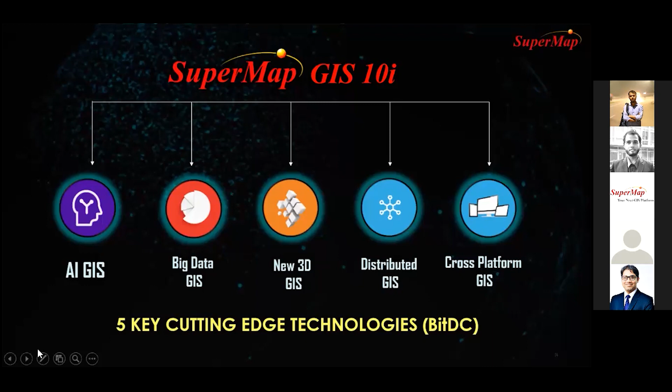Thereafter, the technology that helped SuperMap reach its peak stage is AI technology integrated with GIS. Eventually, with the evolution of new technologies like big data GIS, 3D GIS, cloud GIS, and cross-platform GIS, we reached the plateau of productivity, meaning we attained maturity as a software company.

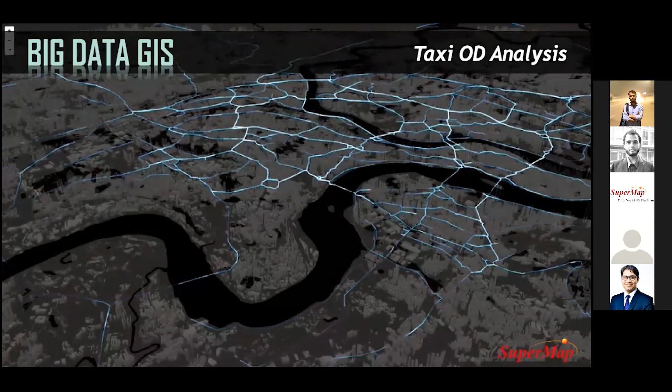About big data GIS in SuperMap: it has high ability for big data management, analysis, data processing, and visualization. Here is a demo showing the big data of Chongqing City's dynamic track in the morning peak hour. We gathered real-time GPS data of the taxis and showed them on the map like this.

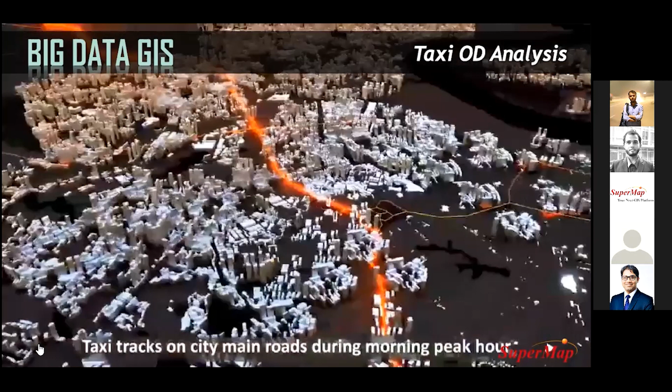In 2018, SuperMap released the new technology of artificial intelligence through the integration of GIS with AI. Many successful cases have been achieved in different countries. Two of the most updated solutions are the palm tree detection project and the building detection from oblique photogrammetry, where deep learning was used.

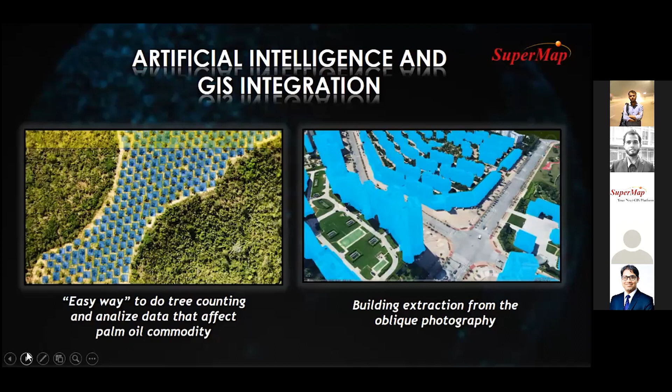Now, the next technology is 3D GIS. By using the spatial 3D data model format, we can achieve Open Geospatial Consortium. Here are some pictures of multiple sources of 3D that SuperMap can support.

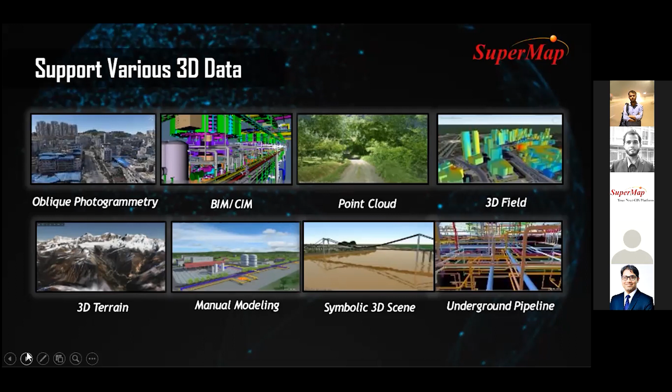These include but are not limited to 3D terrain, oblique photogrammetry, BIM, point cloud, artificial model, water surface, underground pipeline, and 3D field. I'm going to show you another demo regarding the 3D supported cross-platform. This is an oblique photogrammetry model of an industrial park.

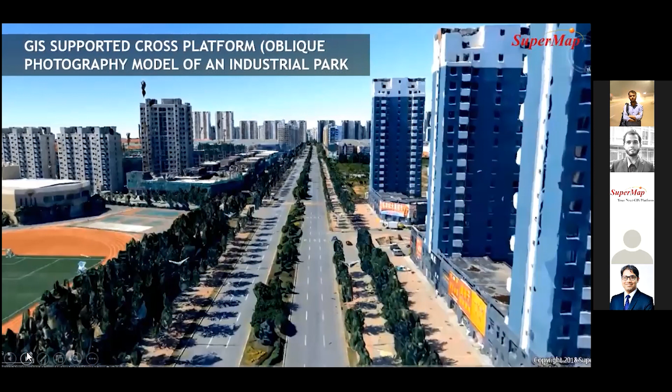Another demo is about the model data. Here, the model data is about 500 square kilometers. But as you can see from the video, SuperMap can load it really smoothly and quickly.

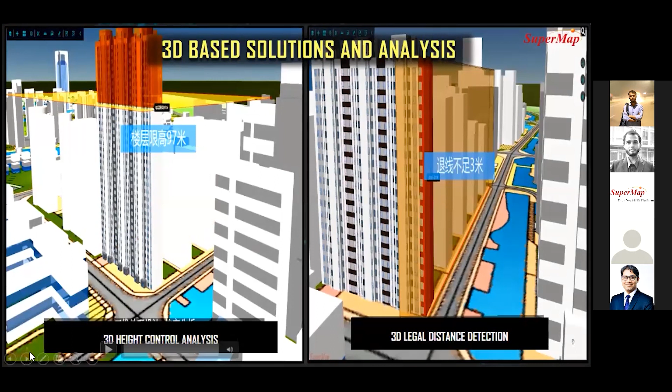This is about distributed GIS technology, and it includes edge GIS technology, cloud native GIS technology, distributed geospatial analysis and processing technology, distributed geospatial data engine technology, and geo-blockchain technology.

Now about cloud native GIS: it deeply integrates microservices and Docker layout, and provides a variety of SDKs to build big data, AI, and 3D GIS application systems based on the cloud native architecture.

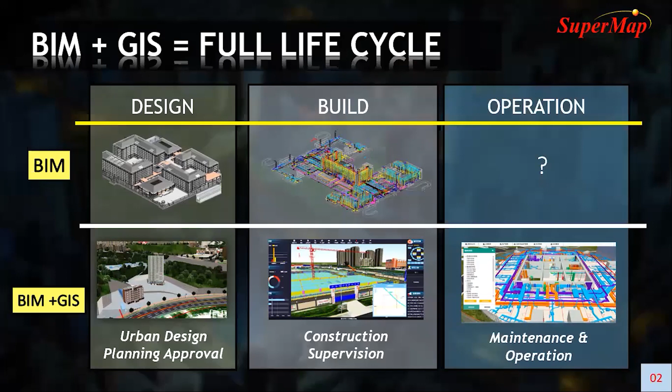Obaidur, we cannot hear you. Okay, so sorry.

The reason this matters is that GIS information can be applied at the country, regional, or city scale. On the other hand, BIM data is closely tied to designing and constructing a specific object, structure, or shape. By combining these two, you get the capability to build any structure at an object level.

Here you can see vector data plus BIM, terrain dataset plus BIM, oblique imagery plus BIM, and video with BIM showing 3D simulation and street views. You can gather field datasets—oblique photography, terrain, point cloud, and also pipeline and water effects—into a single spatial 3D model.

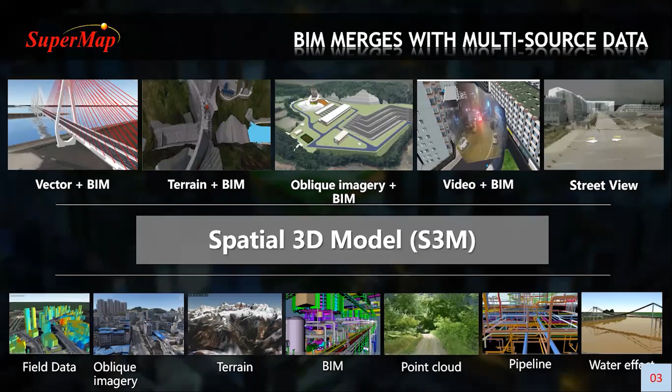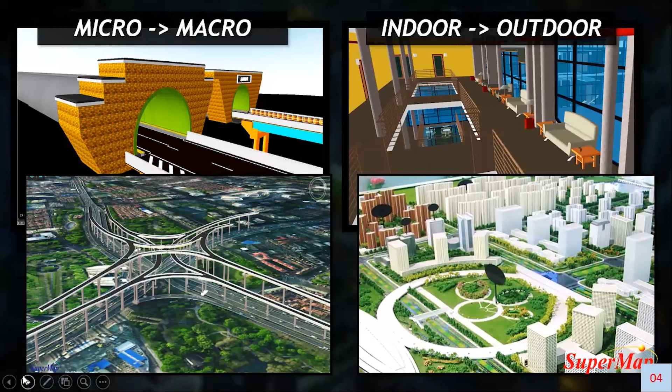So GIS adds to the picture by adding a smarter and larger environmental context, meaning that the object becomes part of the route, utilities, and land in that environment. Integrating GIS and BIM data allows design and construction companies to collect accurate and valuable data that leads to much more effective and efficient design and project management, like this.

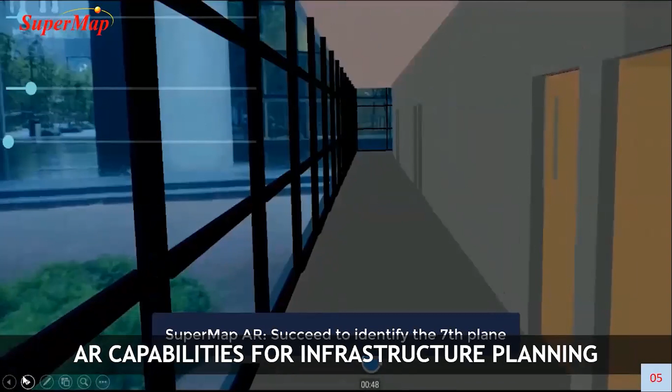Here you can see AR capabilities, augmented reality for infrastructure planning, which combines BIM and GIS in an integrated way to capture, design, and maintain. For future perspectives, it can allow you to identify any floor or any object of the building.

Here are some of the benefits of BIM and GIS integration. The query system for objects according to query conditions includes contain, within, disjoint, intersect, and so on—other methods to query your BIM model and also GIS datasets.

Some of the benefits of BIM and GIS integration may be eliminating data redundancy, moving data seamlessly between the stages of the design and construction process, adding more effective geospatial context to the BIM process, reducing cost and saving money, and better, improved design.

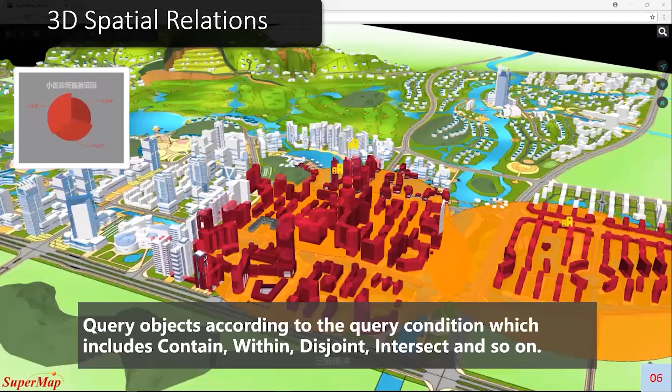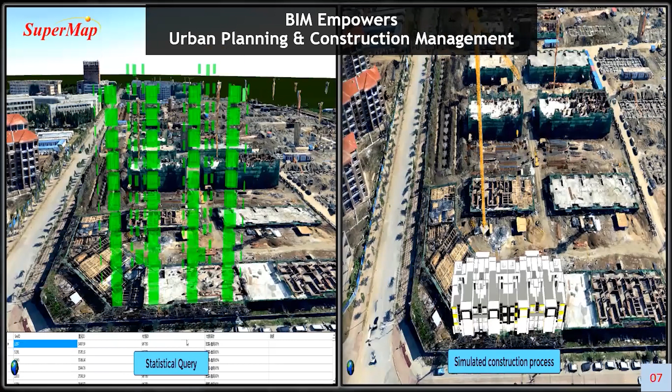Here you can see the query objects according to the query condition, and BIM empowers urban planning and construction management. On the left side you can see the statistical query, and on the right side you can see the simulated construction process of a building information model, which is really integrated with the geographic information system.

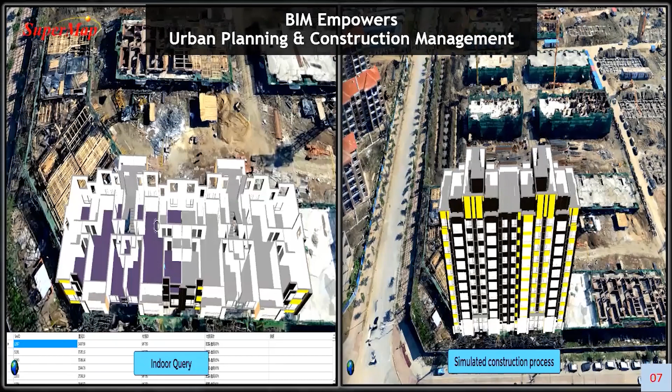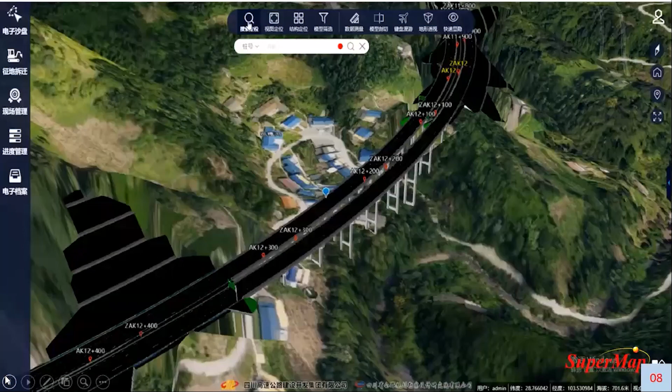Here is an example showing the integration of GIS and BIM, showing the construction of bridges along with GIS, visualizing the dataset in both 2D and 3D, and spatial querying of the BIM and GIS datasets.

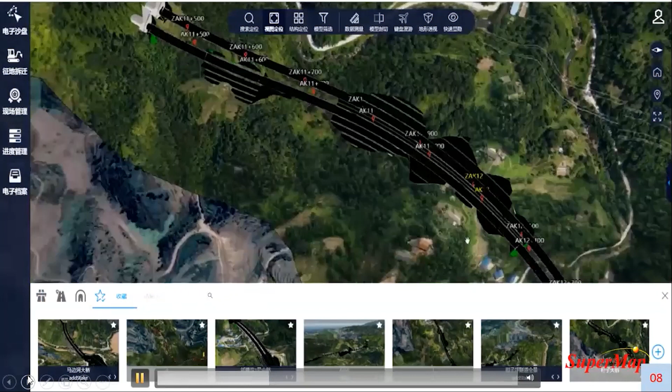This is combining oblique photography, BIM, and 2D and 3D GIS datasets. So the important part is to import the BIM dataset into the GIS platform. SuperMap has a plugin conversion tool that uses common intermediate formats of BIM datasets, allowing you to import from services like Autodesk Revit, Bentley Infrastructure, Autodesk Civil, and other applications.

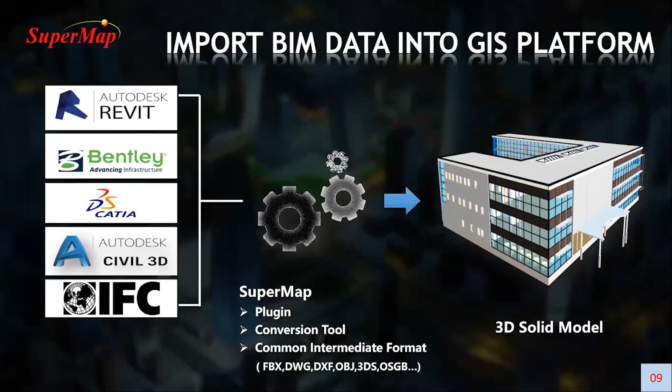Let's go ahead to smart city and urban planning with SuperMap. GIS is actually deployed at every stage of planning and development of a smart city. The underlying framework is served by information and communication technologies, while the focus is on the spatial or GIS element. SuperMap operates across all stages of the life cycle, from modeling, planning, and building to managing, across the full spectrum of functionalities.

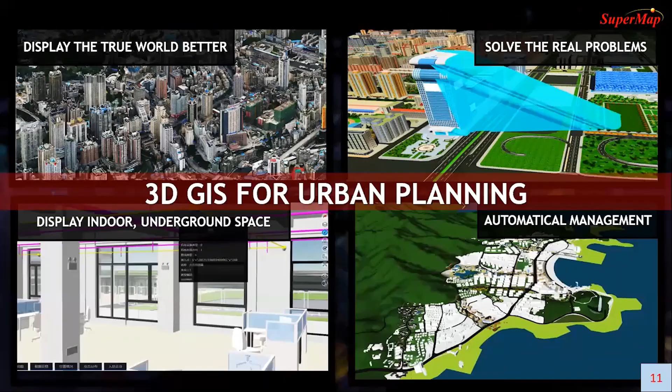Five major technologies support territorial spatial planning. Various types of planning data are analyzed, multi-plan data standards are sorted out, and multi-plan differences are analyzed. Based on the double evaluation system and the three areas and three lines, the analysis of regional differences and maps, along with a data integration system, formulates unified data standards.

Using big data analysis, calculation, simulation, and other means, we tap into the value of the data and provide strong technical support for building the motherland into a livelihood paradise with green mountains, green waters, and fresh air. Here you can see the display of true world to better solve real world problems, displaying indoor and underground space, and automatic management of development.

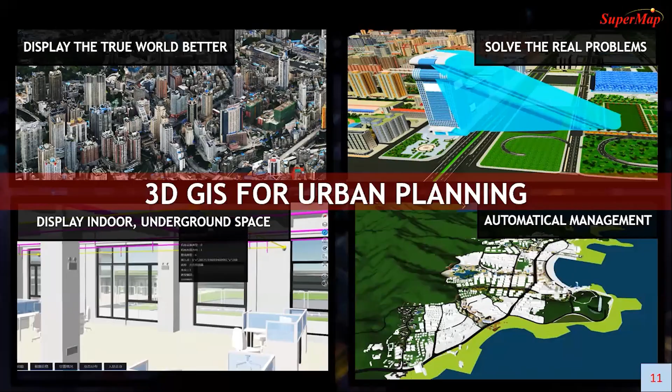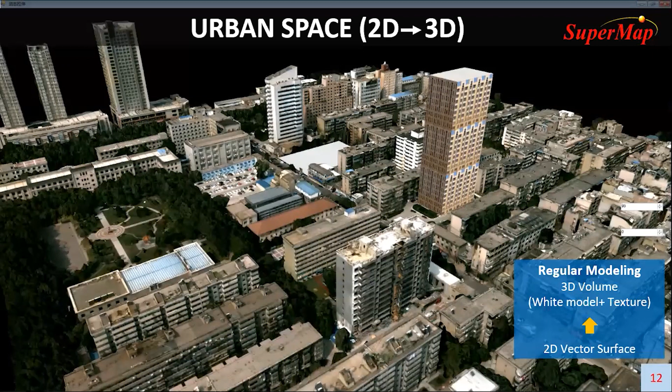This is the modeling of 3D volume using 2D vector surfaces applied to the white model and building texture. Here you can see the vector datasets have been applied to the white model, and texture of buildings has been added, which eventually shows the 3D design of a city or area of the city.

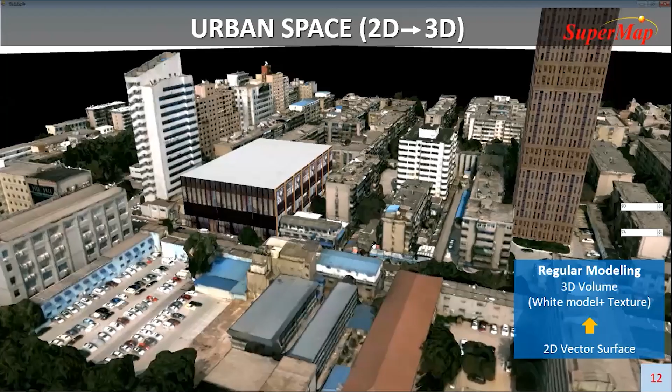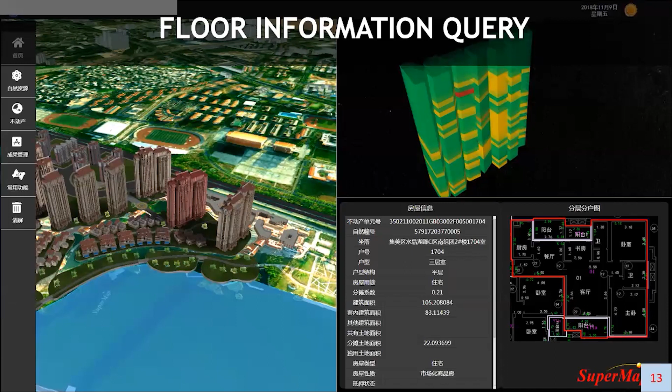Querying each and every floor of the building enables the engineer to work accurately and faster. SuperMap enhances your capabilities to query floor information better than any other solution.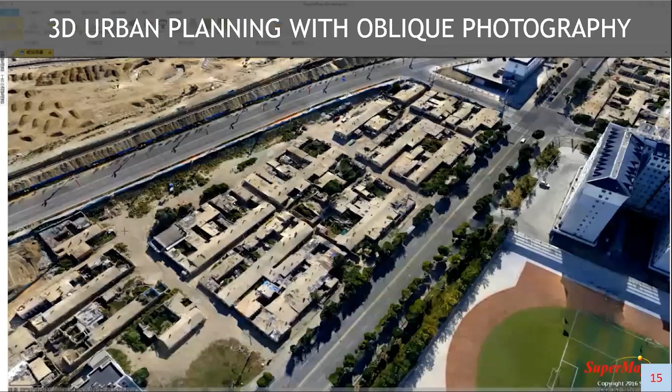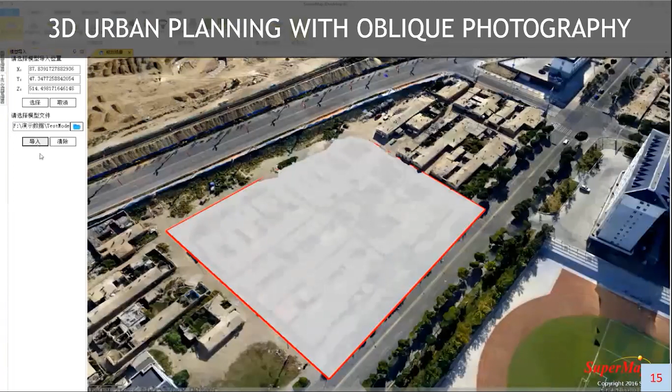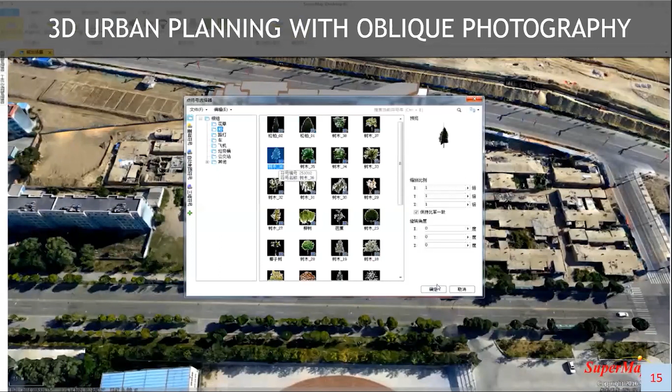Modeling 3D urban planning with oblique photography, which is modeling objects in 3-dimensional form, has been very useful for urban applications such as planning, management, and representation of urban scenarios. Nowadays, 3D city models play a more and more important role in GIS. 3D city modeling is also one of the fastest growing research topics in the technology of photogrammetry. This is a situation where the 3-dimensional auxiliary planning system is used.

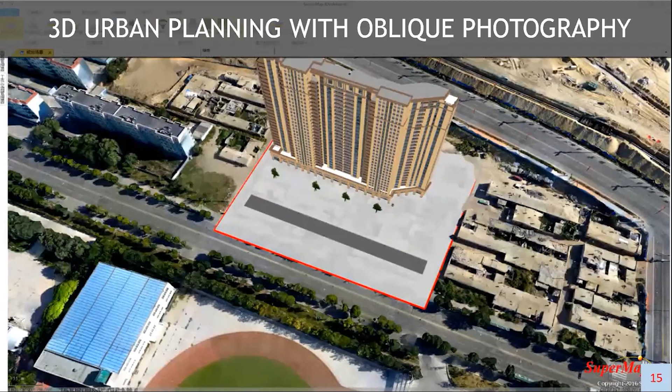SuperMap has the capability to handle large datasets of oblique photogrammetry. Here you can see this dataset is 3.2 terabytes in size, which is oblique photogrammetry, and you can browse faster and visualize clearly using SuperMap.

Let's go ahead to 3D technology for transportation. As in almost every field of life, GIS can help achieve excellence in transportation as well. It significantly aids in planning, monitoring, and managing complex systems involved in transportation planning and management more effectively. GIS helps in determining capacity management, capacity enhancement, improving operation, and identifying the most strategic investments for keeping the transportation system in any country running operationally.

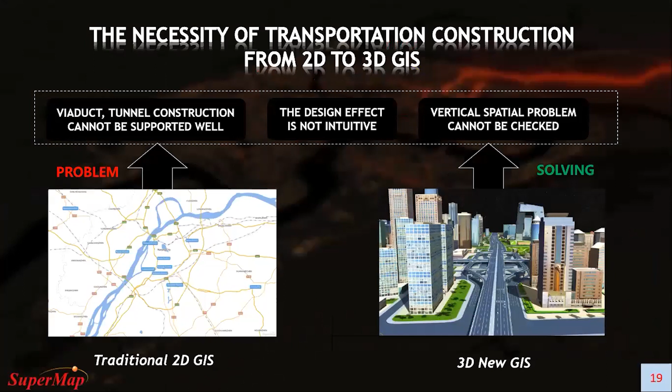Let's try to understand how we can use GIS transportation for better management of road infrastructure. Here you can see the necessity of transportation construction moving from 2D to 3D GIS. In our traditional 2D GIS, we normally face problems like viaduct, tunnel construction not being well supported, design effects not being intuitive, or vertical spatial problems not being checkable. All of these problems can be solved using 3D GIS in transportation construction.

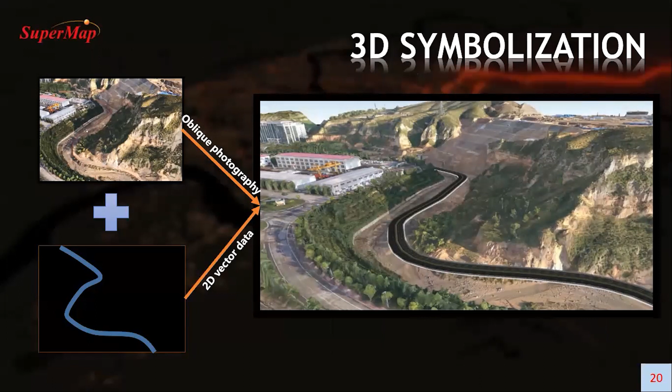Here you can see oblique photography, which is a 3D photogrammetry model, and using 2D vector datasets, we can produce a 3D symbolization of road transportation. You can also integrate 2D and 3D visualization in SuperMap.

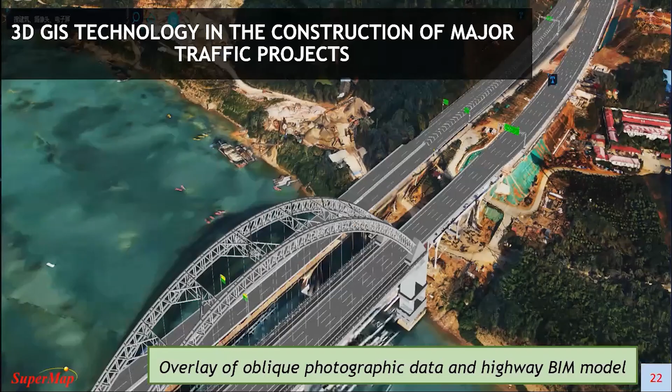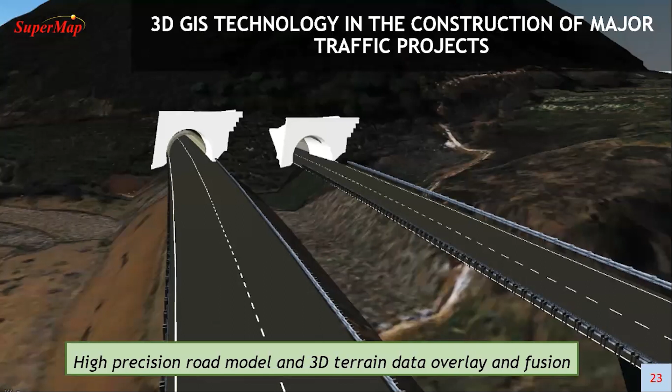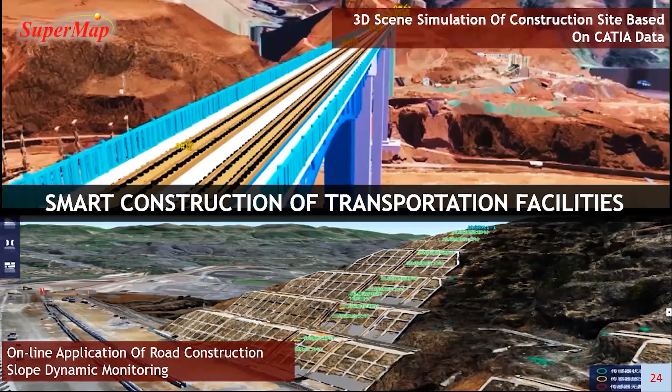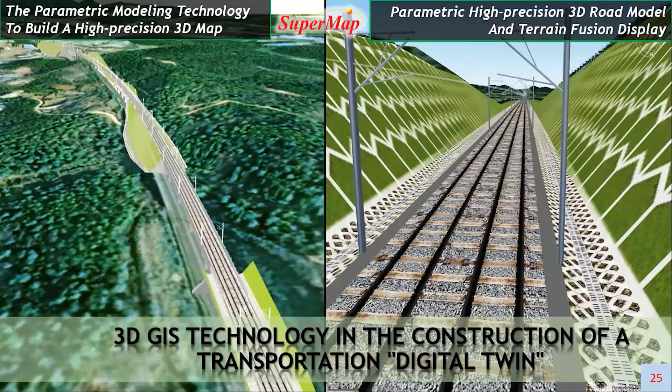This is from the dataset of the computer-aided 3D interactive platform called CATIA, where you can do smart construction of transportation facilities based on online road construction and slope dynamic monitoring applications. On the left you can see parametric modeling technology used to build a high precision 3D map, and on the right the parametric high precision 3D road model and terrain fusion display, which are significant examples of 3D GIS technology in the construction of transportation GIS or transportation digital twin.

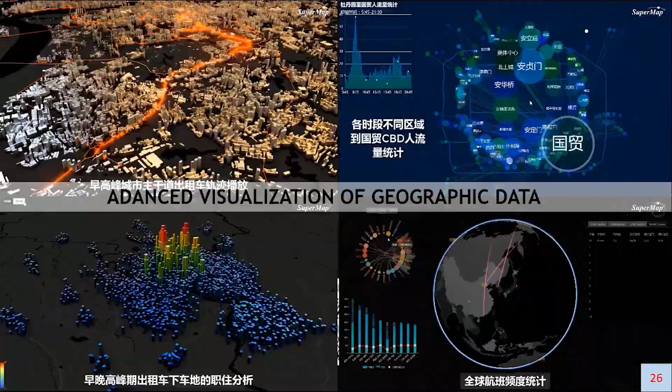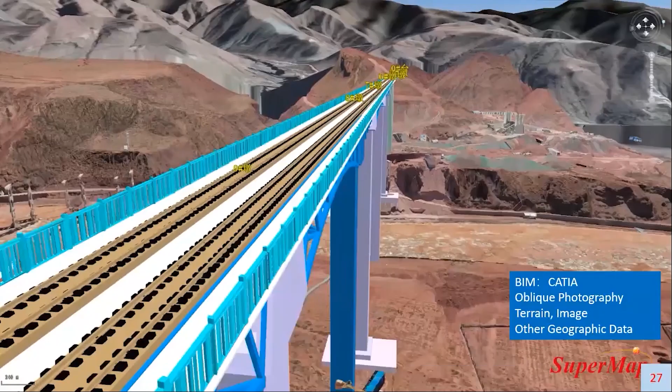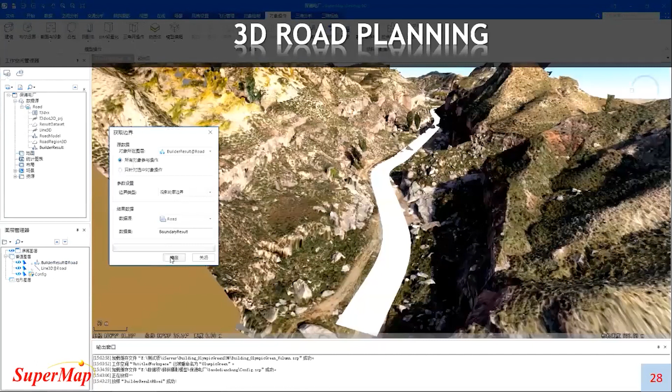This is the integration of 2D GIS data and oblique photogrammetry while planning a road network for a development purpose. Here you can see the 2D road dataset using SuperMap, and also the terrain dataset from oblique photography, integrated into a single dataset to show the 3D model of road transportation planning.

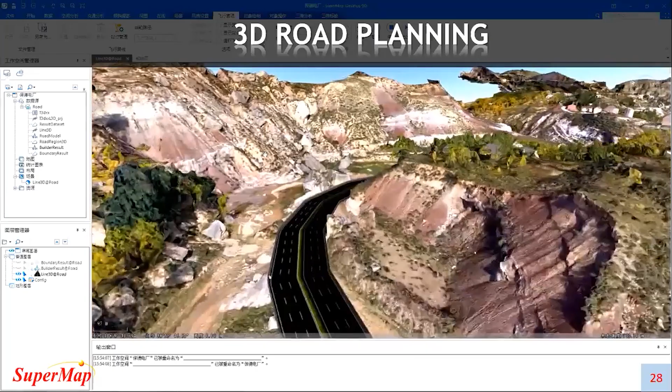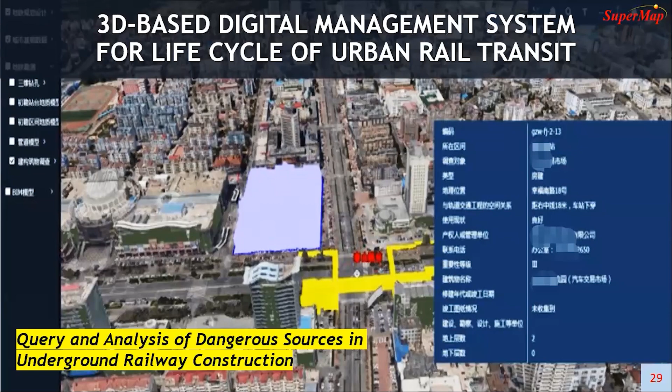One of the major challenges for sustainable development faced by both developed and developing countries is to ensure that all people continue to have reliable access to water supply, sanitation, and other liquid services. Water supply assessment and management are inherently geographical activities requiring the handling of multiple forms of spatial datasets. Various combinations of geographic information systems (GIS) and simulation models are required to improve our knowledge in these areas.

GIS offers a powerful new tool for the collection, storage, management, and display of map-related information, whereas simulation models can provide decision makers with interactive analysis tools for understanding the physical system and judging how management actions might affect that system.

There are four key technologies for smart water or pipeline solutions. First, cloud computing, where you can do resource pooling, elastic expansion, and fast delivery. Second, big data, which involves distributed storage, distributed computing, data mining, and data insight. Third, IoT, the Internet of Things, which uses cameras, sensors, wearable devices, and 4G networks, improving day by day as 5G and 6G emerge.

And last but not least, GIS, the Geographic Information System, which allows map displaying, spatial analysis, and 2D and 3D simulation projects.

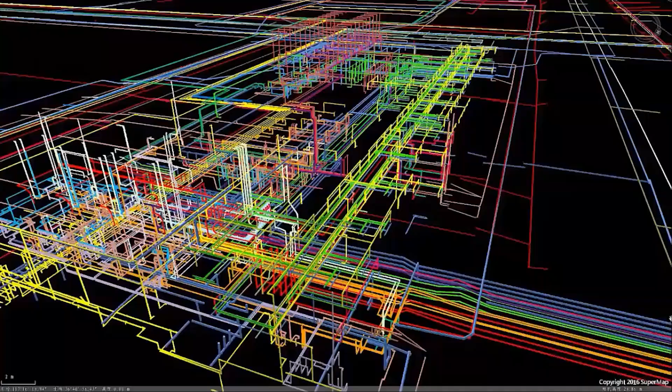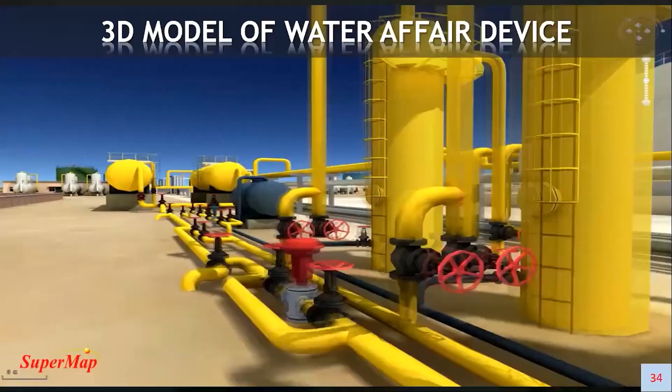Here you can see a simulation of pipeline management in a large area using SuperMap, along with the effect and realistic model of water affair devices.

This is also the effect of liquid flowing within the pipeline. Here you can see how it bears the effect of liquid flow in the pipeline, which is very useful for the management and control of long distance pipelines and oil fields.

As Bangladesh has a land rich in natural gas, this type of monitoring is more necessary for civil engineers and planners.

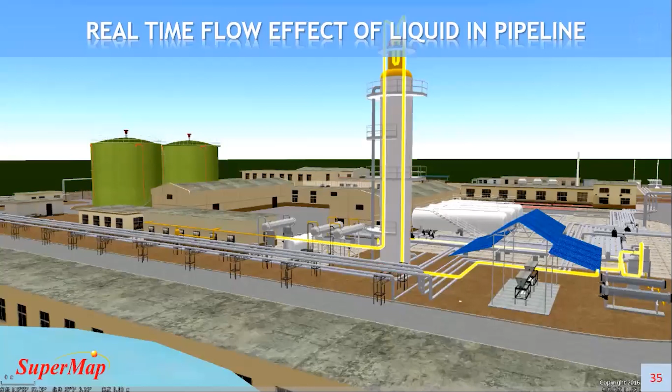Here comes the monitoring and control context. Monitoring and alarming allow for water quality monitoring and alarming, such as pH or water level alarm information management, and contingency plan management, including plan management, plan editing, and plan approval or update. The last one, accident processing management, allows for alarm processing and workflow management.

So this is the utility and facility management through SuperMap.

GIS actually integrates with top facility management software, or FM software, used in consulting firms, making it easier than ever to extend the life of your facility management datasets.

GIS can be used throughout the life cycle of the facility, from deciding where to build to space planning. GIS helps streamline asset information collection, dissemination, maintenance, and use, and facilitates better planning and analysis, allowing efficient sharing of information in and out of the field, providing a comprehensive view of operations.

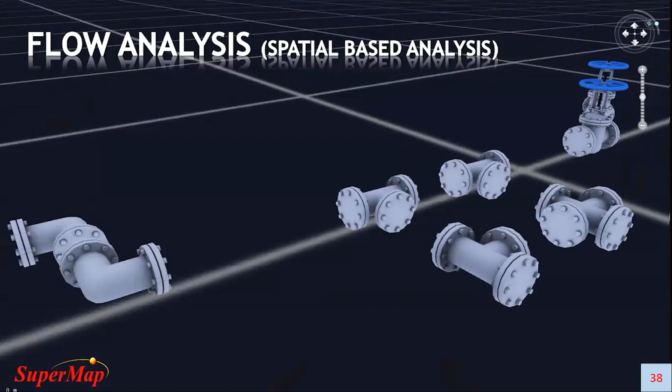Here you can see spatial-based flow analysis. You can see the allocation of the pipeline elbows, the pipe distribution, their connectivity, and the flow of these pipelines using SuperMap.

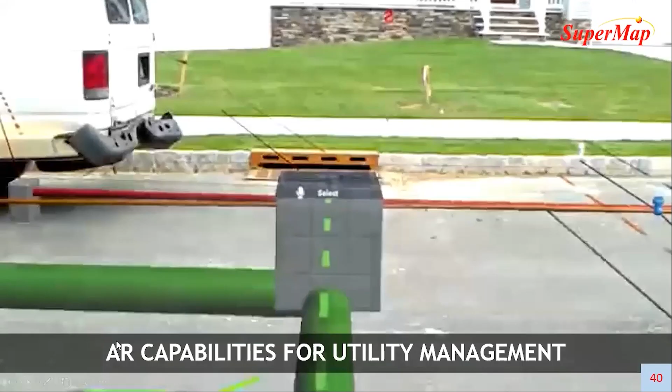And then here comes augmented reality capabilities for utility management. Here you can check real-time datasets and real-time monitoring of pipeline management or utility management.

So the geotechnical solution in SuperMap - SuperMap has the latest tools for geotechnical engineers. Its capacities range from conventional data storage to complex spatial analysis and geographical presentation.

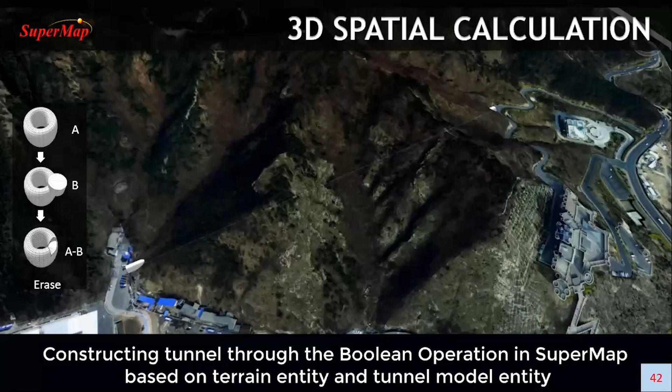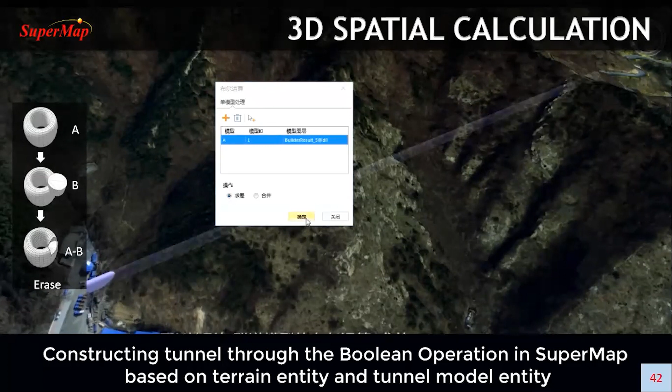Here you can see constructing a tunnel through the Boolean operation in SuperMap, based on terrain entity and tunnel model entity. In Bangladesh, the future of transportation is moving ahead through tunnel planning and implementation.

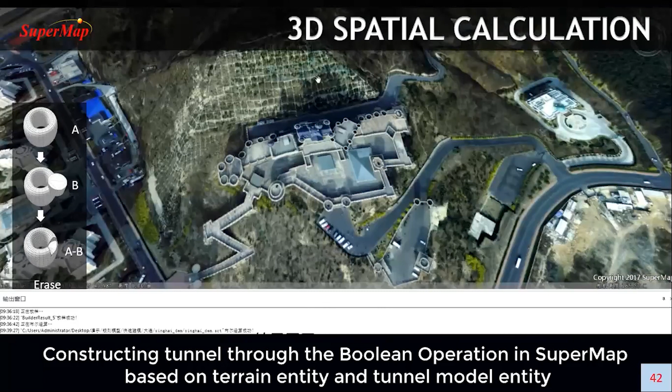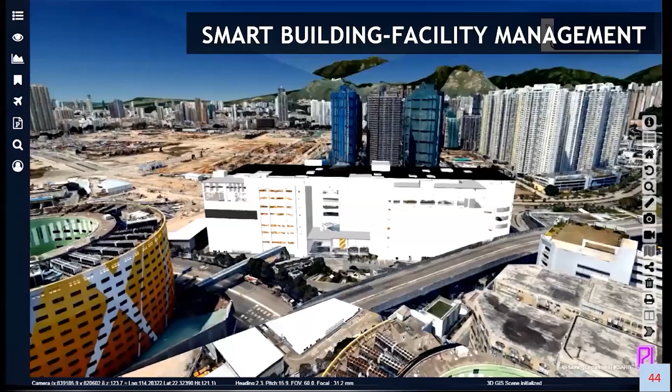So here come some project-based solution cases by SuperMap. SuperMap has done a lot of projects in several countries of the world. Here you can see the smart building facility management solution.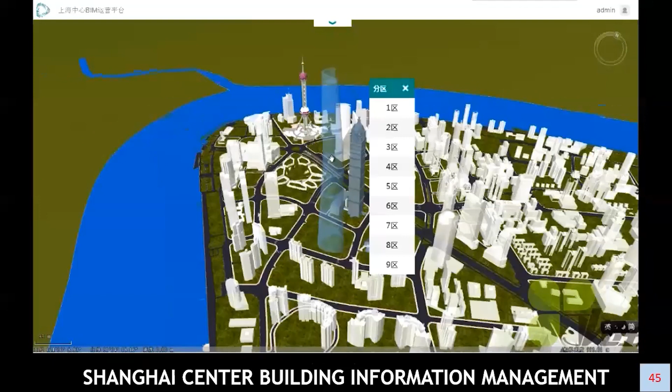Here is another example, the Shanghai Center building information management solution using SuperMap, which can be maintained continuously.

Another example of SuperMap solution cases is the smart city in Hong Kong CBD, the Central Business District of Hong Kong. This is actually a 0.5 meter resolution 3D model rendered in high precision.

Here you can see there are a vast number of layers, and you can also add or detect something. You can also query the buildings.

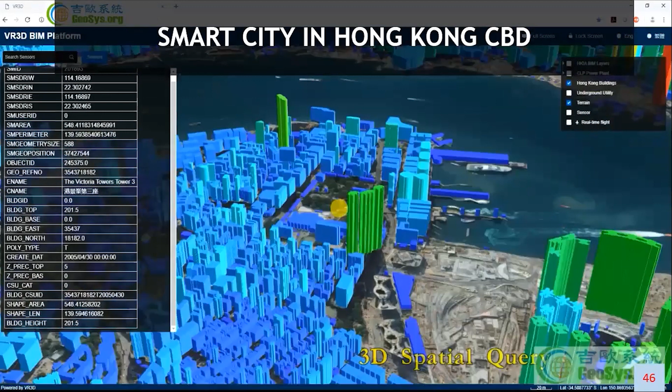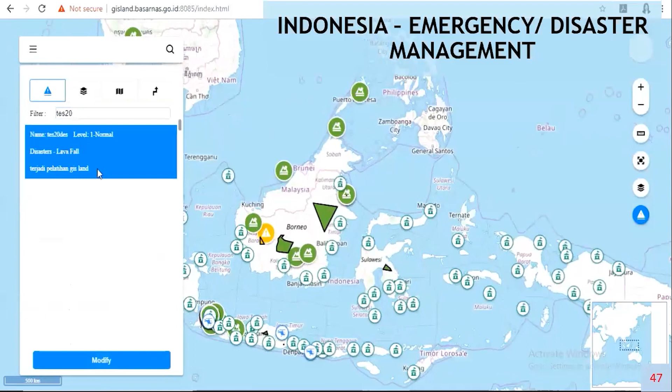So here is another case solution in Indonesia, which is an emergency disaster management solution for different districts and provinces of Indonesia. Here you can search and also query information regarding the offices.

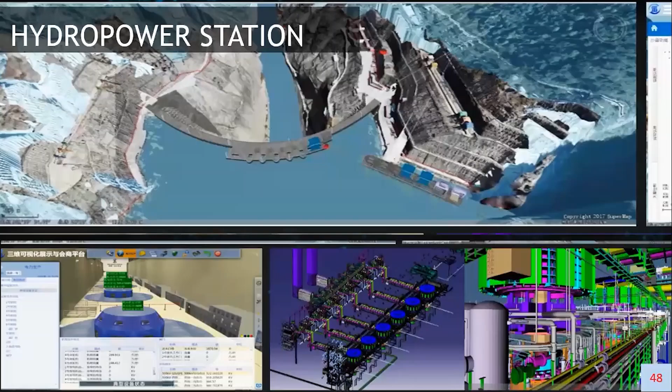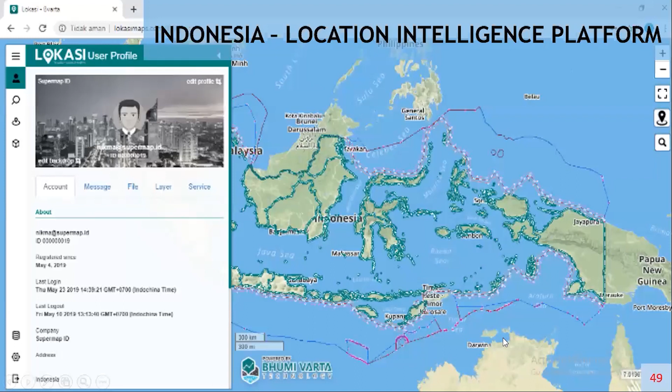And this is another example mainly related to civil engineering projects, which is a hydropower station here. And another one is the Indonesia Location Intelligence Platform.

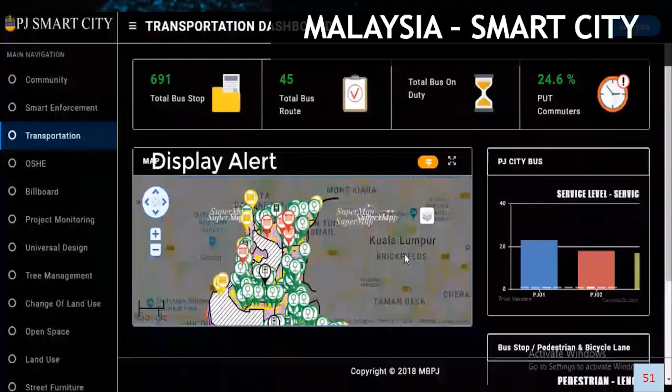Here you can see a number of navigation options where you can navigate through transportation, billboards, tree management, open space management, land use, and also street furniture.